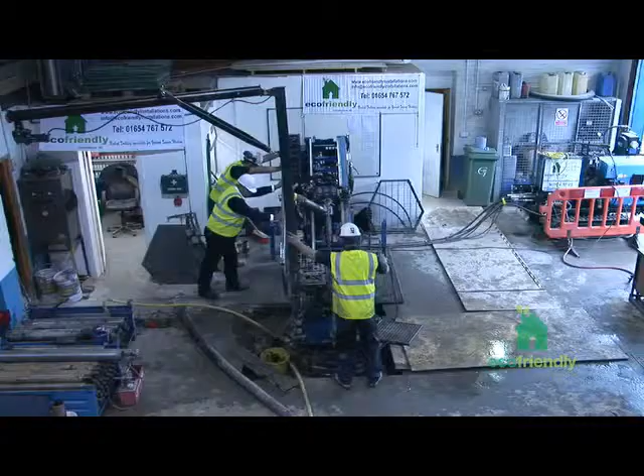This is a short promotional overview to show what we do at eco-friendly installations. This will demonstrate each stage of the installation and all the planning involved for a successful system.

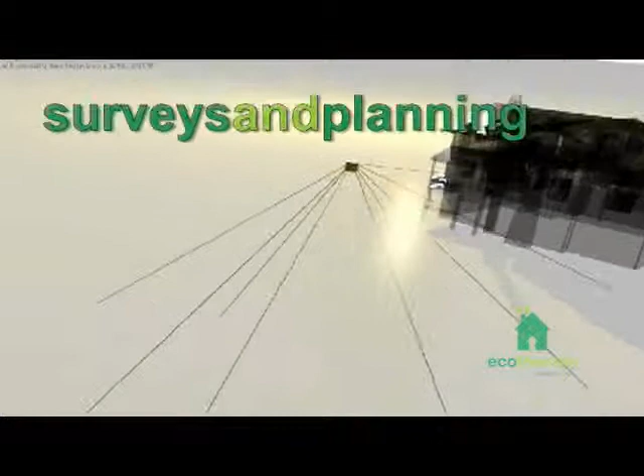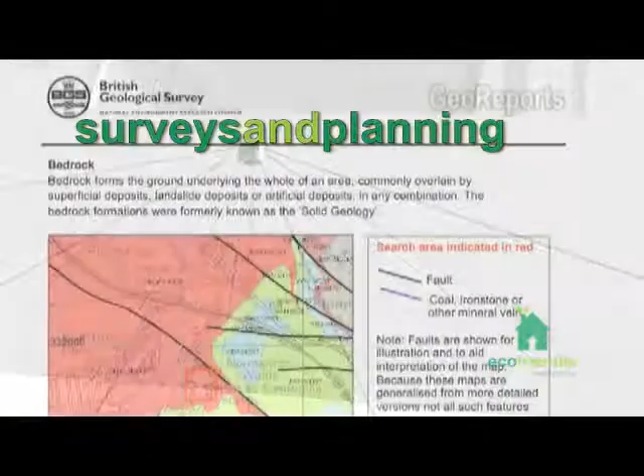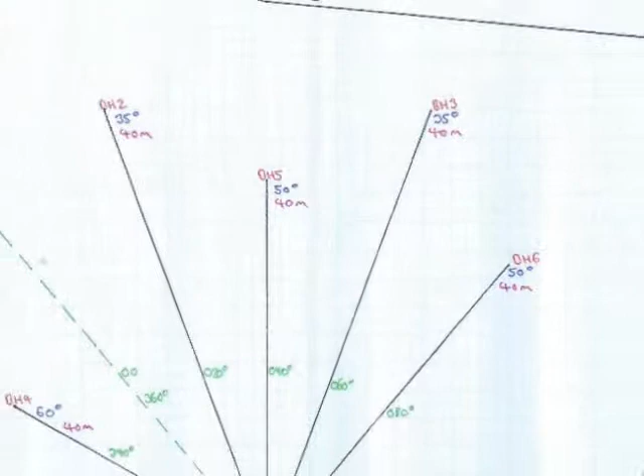Prior to any installation, we will conduct at least one site visit to ensure it is a viable project. If a customer wishes to proceed, we will arrange a geological survey. This will give us a detailed picture of the ground under our feet, enabling us to work out the renewable heat extraction rate. It is vital we match the capability of the ground and the heat pump to the size and the heat requirement of the property.

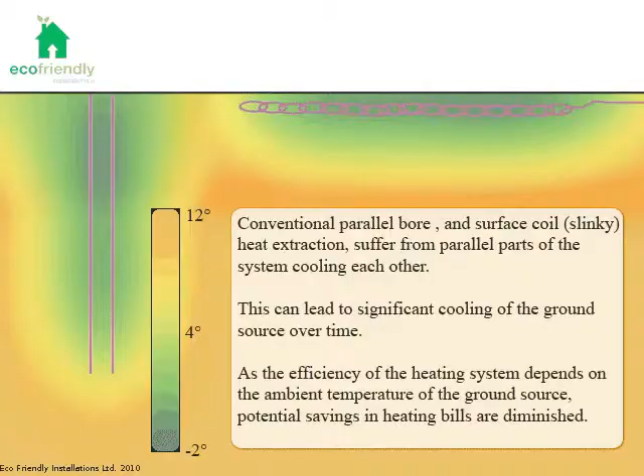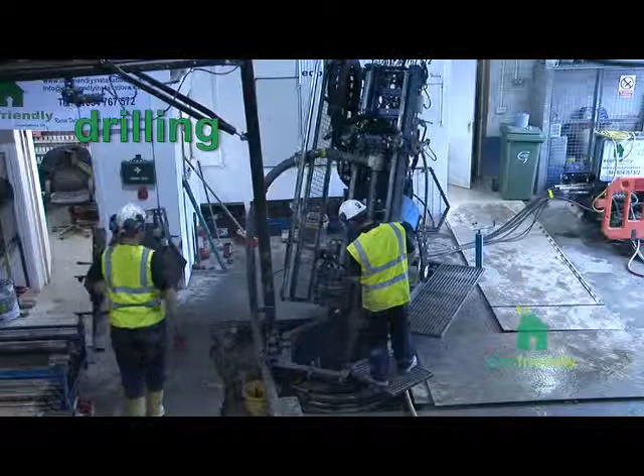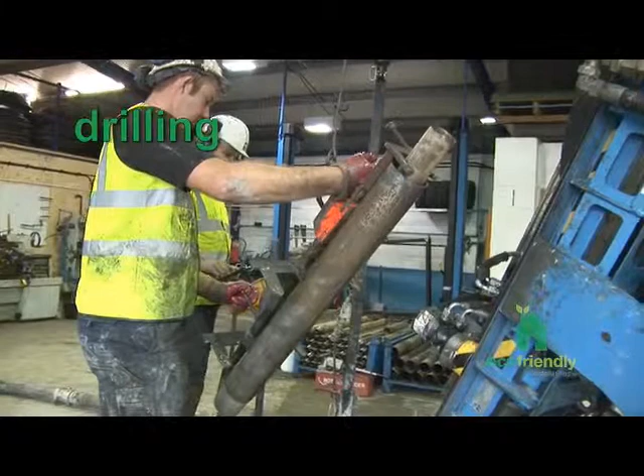Prior to the drill rig arriving on site, we would have already cemented the chamber in place, acting as both an anchor and an aid for the drill rig to lift itself onto. Once the drill head is firmly attached to the chamber, the power unit detaches from the drill head and sits to the rear. We drill with 1 meter long casings and rods.

We'll only drill with rods once we've determined that the ground is firm enough to hold. If it were in soft ground, we may drill the whole 50 meters through casings, and then the casings act as a liner for us to install the pipe and grout at the final stages.

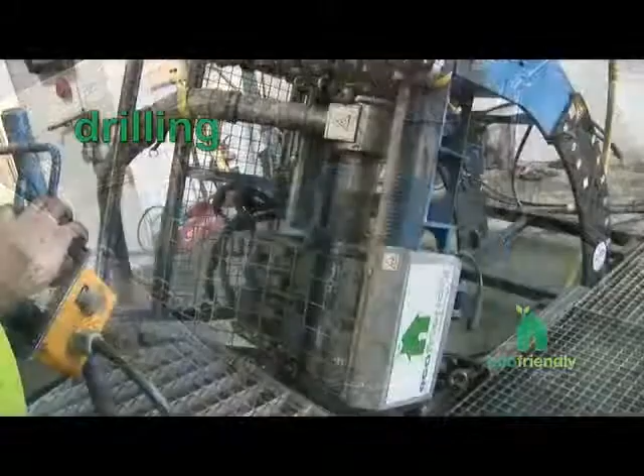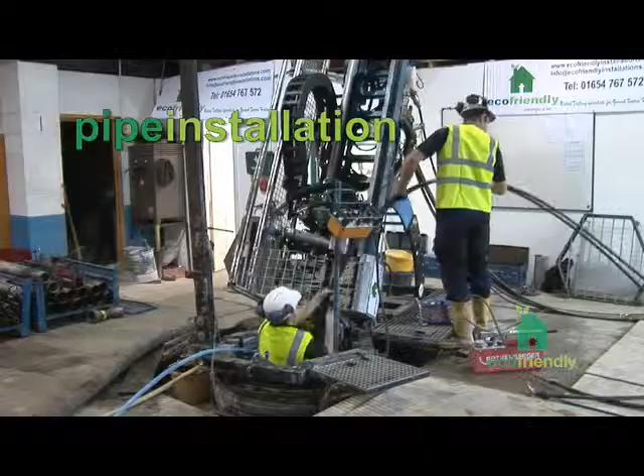After we've drilled and removed the rods, we insert a plastic fusion welded closed loop, a flow and return system with diameter of 25 millimeters. With the loop, we also insert the grout pipe for later use.

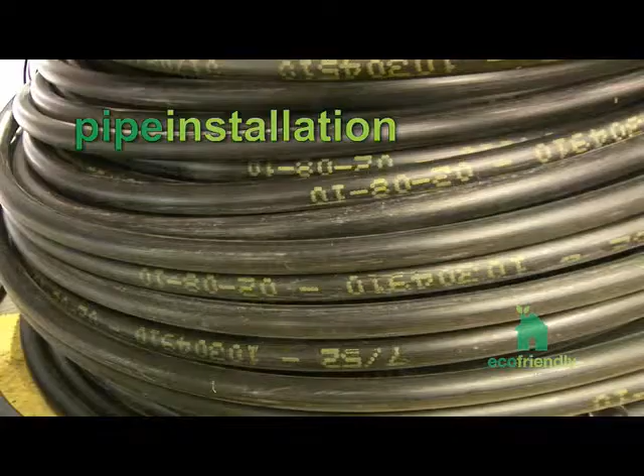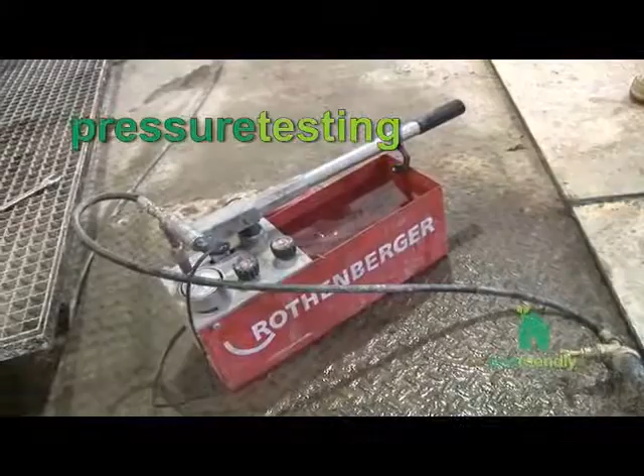Once the pipe has been inserted, we pressure test it. We do it now to ensure no damage has occurred to the pipe during its insertion down the bore. We put the pipe through various tests, reaching pressures of up to 6 bar. Once we're happy with the pipe's integrity, we will grout the pipe in place and remove any casings.

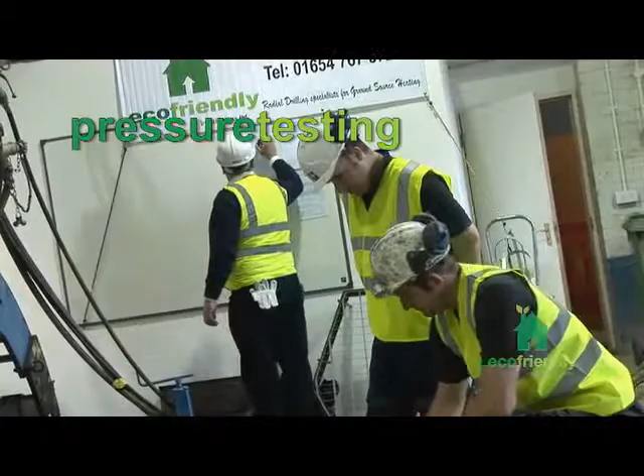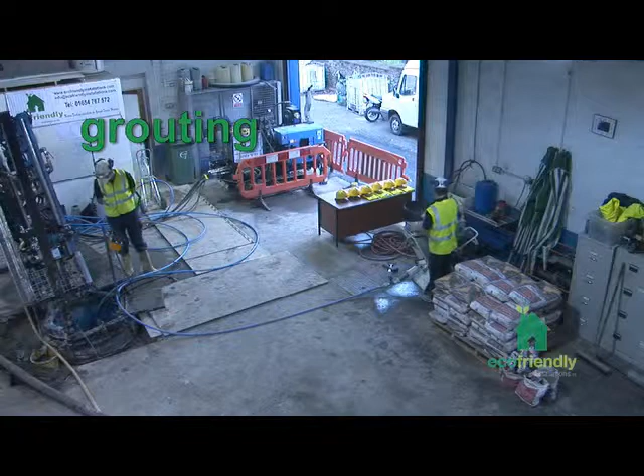When grouting, we use a special grout with thermal properties to assist in transfer of the heat. We always grout from the bottom to the top of the borehole, making sure we don't leave any air gaps. We may adjust the consistency of the grout to allow for high or low groundwater.

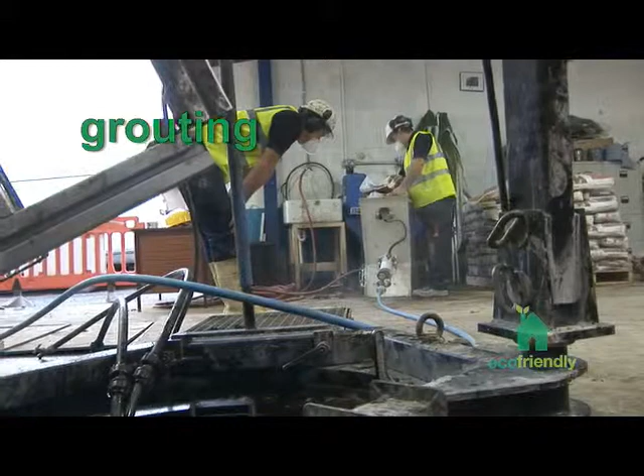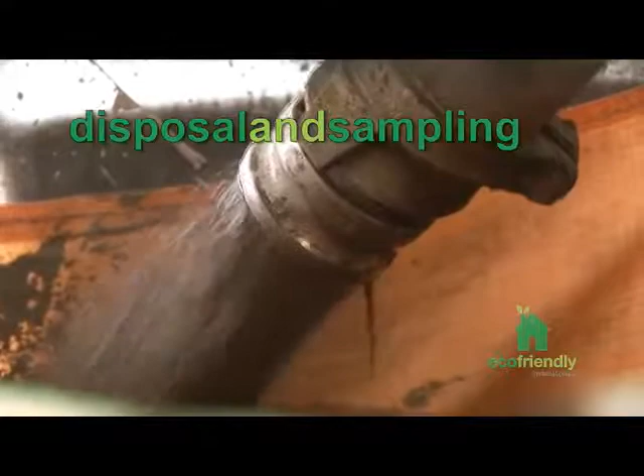As our machine collects the drilling waste, it's easy for us to take accurate samples of the ground. This confirms what the geological report indicated prior to drilling. The first bore we sample every meter, but for subsequent bores we inspect samples every meter but record every 5 meters. If any changes occur in the geology, we can make adjustments then.

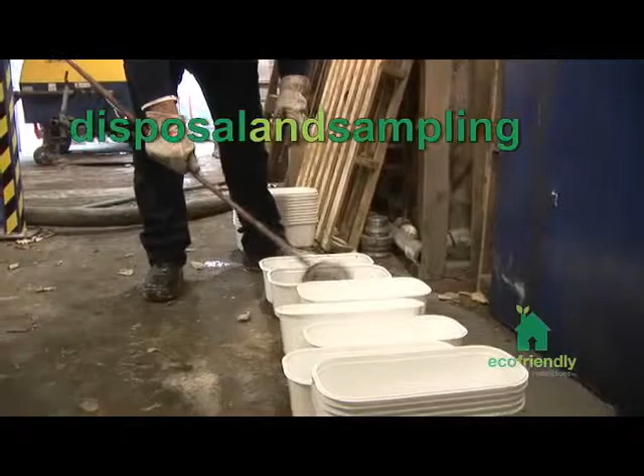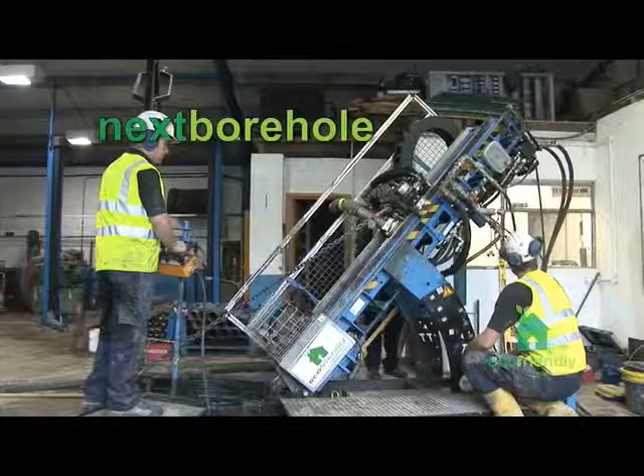We bag up and take away 2 samples, one for the customer, and we keep one for our own UK geology library. After a borehole is completed, we will move on to the next hole, determined by the pre-drawn drill plan. We will always drill the next hole furthest away from the last borehole to minimize any disruption to the soft ground and grout.

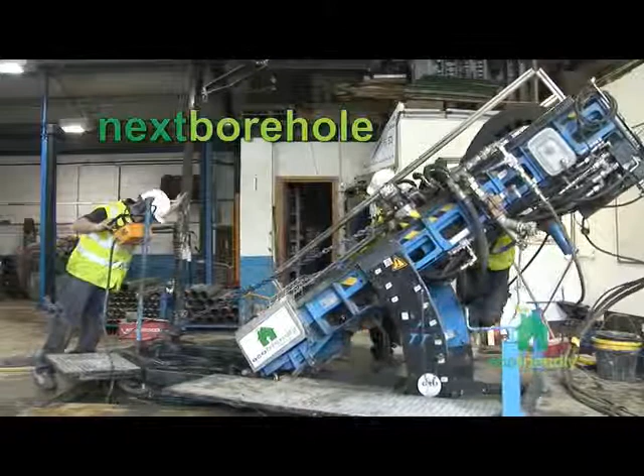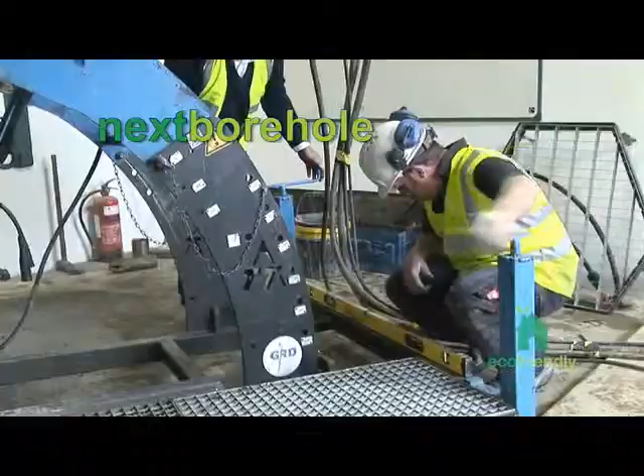Once all the boreholes are drilled, pressure tested and grouted, we manifold the inside of the chamber and connect to the pre-installed feed pipes which run to the heat pump. The cover of the chamber is a rated lid to British standard and is capable of withstanding weight of 17 tons. Finally, we again test the complete system in readiness for connection to the heat pump.